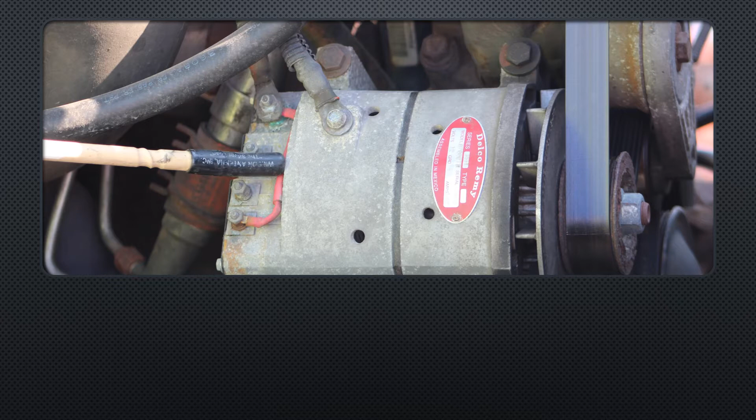Next, we'll move to the engine compartment. Checking alternator to ensure securely mounted and belt driven. Belt is in good condition and proper tension. Checking water pump, securely mounted, not leaking, gear driven. If you have a Mercedes or Cascadia motor, it will be belt driven.

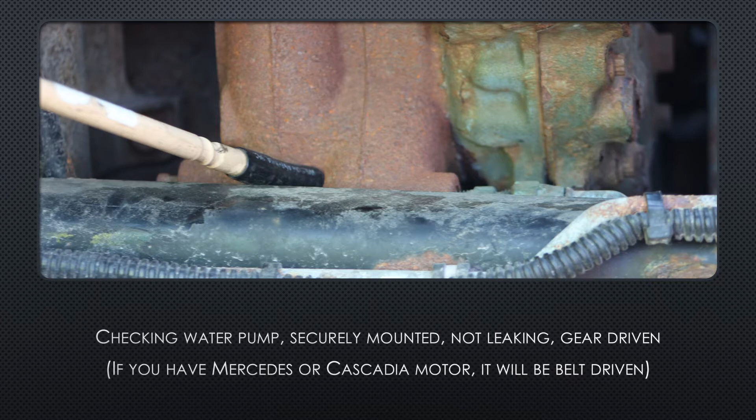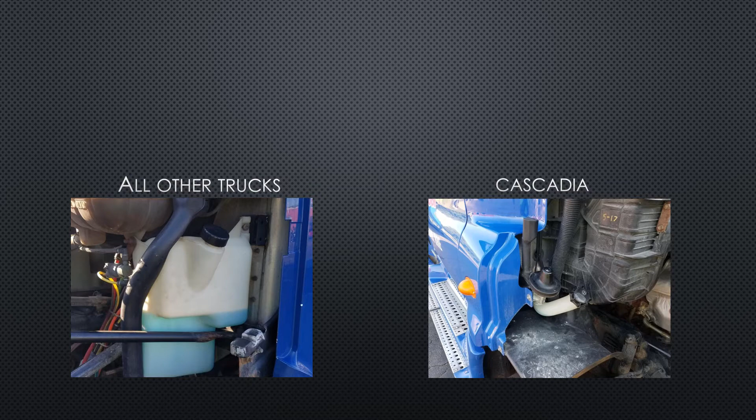Checking coolant reservoir, securely mounted, not leaking, proper level. Windshield washer fluid reservoir, securely mounted, not leaking, and full of fluid. Checking oil dipstick and oil fill cap, make sure you have oil at the proper level and cap is secure.

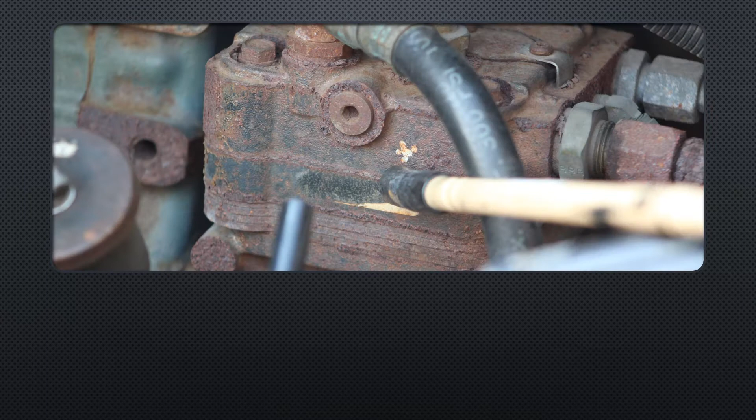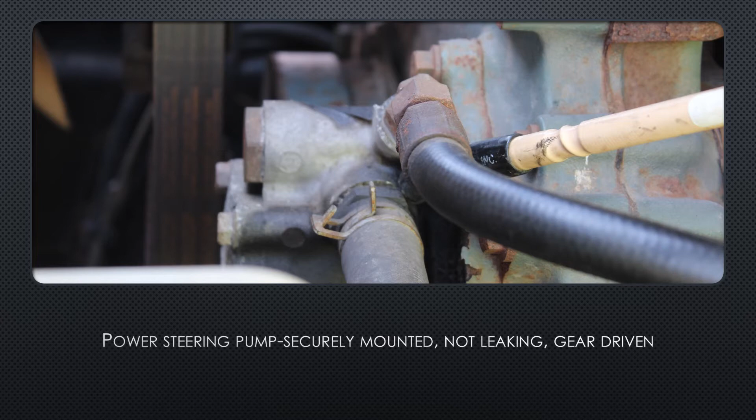Air compressor, securely mounted, not leaking, gear driven. Power steering reservoir, securely mounted, not leaking, at the proper level. Power steering pump, securely mounted, not leaking, gear driven.

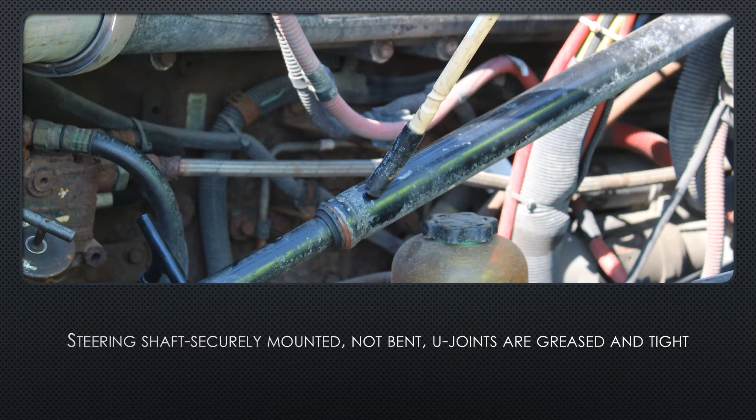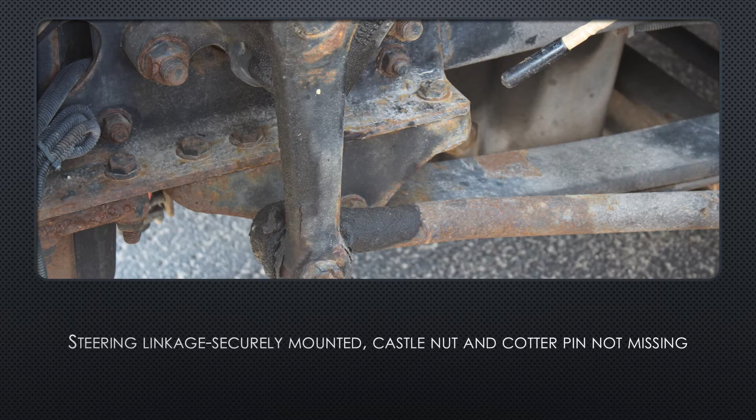Steering shaft, securely mounted, not bent, U-joints are greased and tight. Steering linkage, securely mounted, castle nut and cotter pin not missing. Steering gearbox, securely mounted, no missing bolts, not leaking.

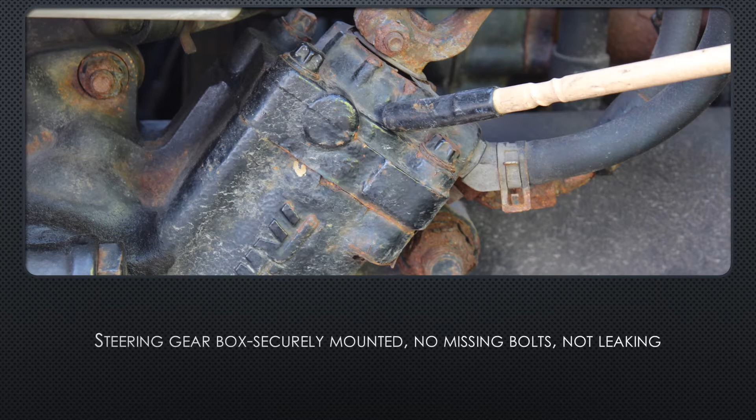General hoses and clamps are tight and not leaking. No leaks on the ground.

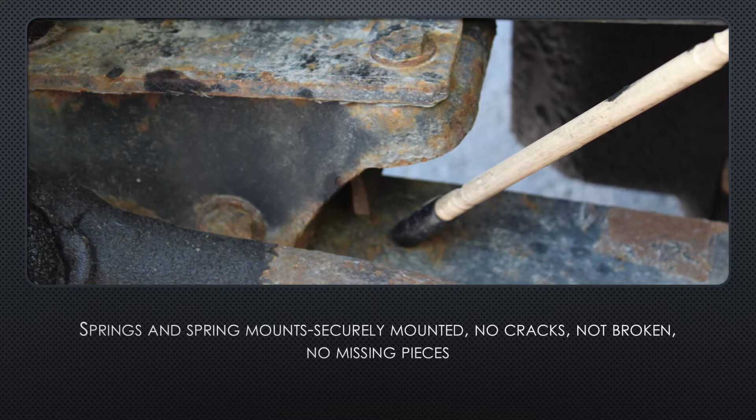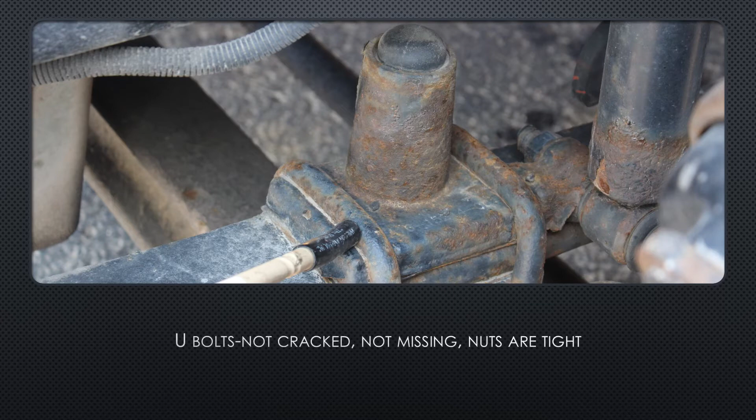Next, we'll move to steering axle, suspension, brakes, and tires. Springs and spring mounts, securely mounted, no cracks, not broken, no missing pieces. U-bolts, not cracked, not missing, nuts are tight.

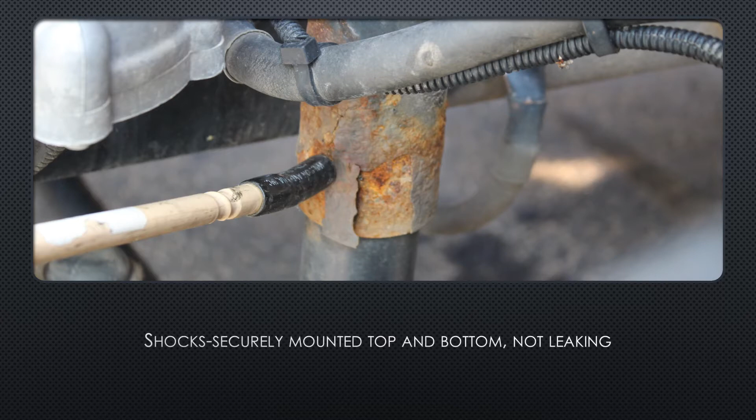Shocks, securely mounted, top and bottom, not leaking. Brake hoses, securely mounted, no cuts, not frayed, not leaking. Brake chamber, securely mounted, not damaged or leaking.

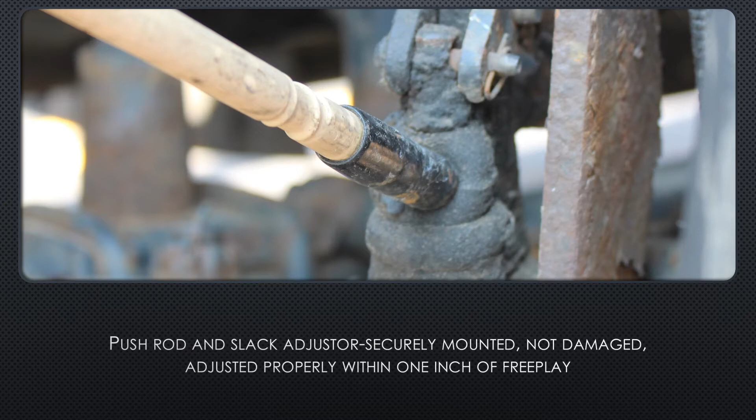Push rod and slack adjuster, securely mounted, not damaged, adjusted properly, within 1 inch of free play. Drums, pads, and liners, securely mounted, not damaged, broken, or missing, proper thickness, and no excessive grease.

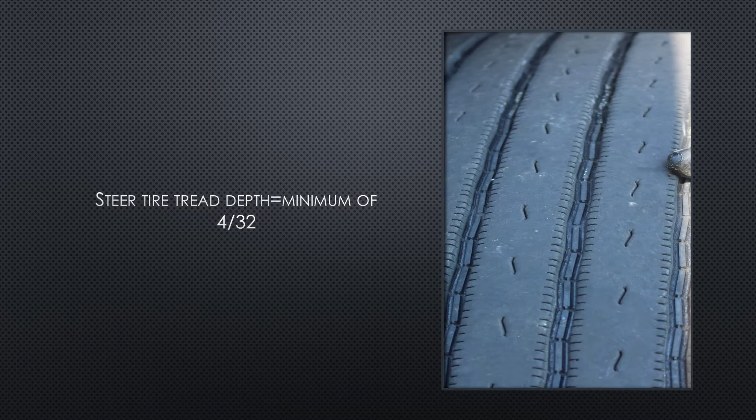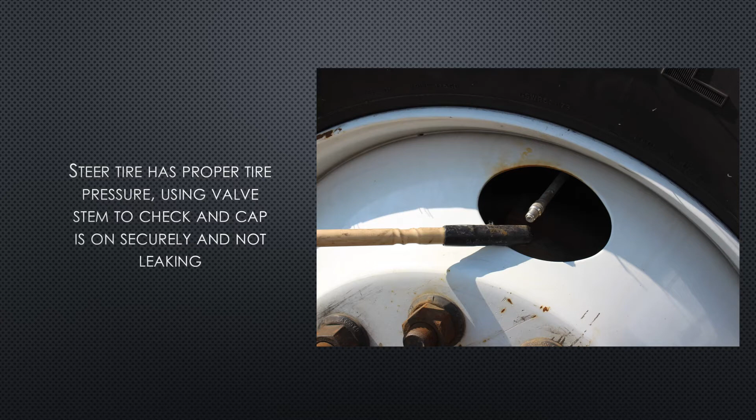Steer tire tread depth, minimum of 4/32. Steer tire sidewalls, no cuts or bruising. Steer tire has proper tire pressure, using valve stem to check and cap is on securely and not leaking. Steer tire rim, no cracks, no dents, no welds, securely mounted with lug nuts.

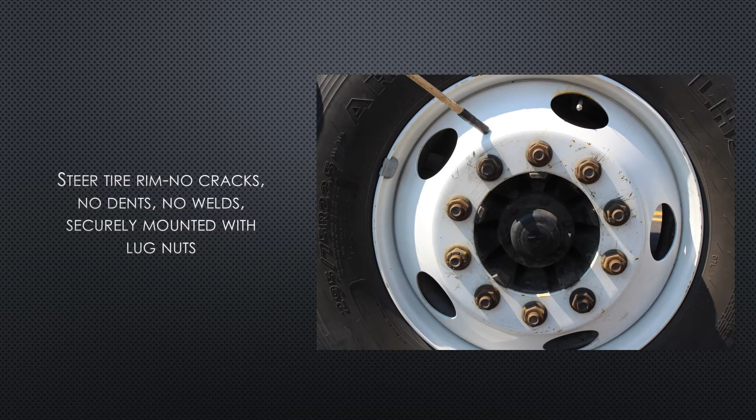Steer tire lug nuts, all there, all tight. No signs of looseness like rust spray or metal shavings. Steer tire hub oil seal, securely mounted, not leaking, oil at proper level.

Next, you will move to the vehicle side. Mirror, securely mounted, not damaged or missing. Door hinge, not rusted or broken. Door opens and closes properly.

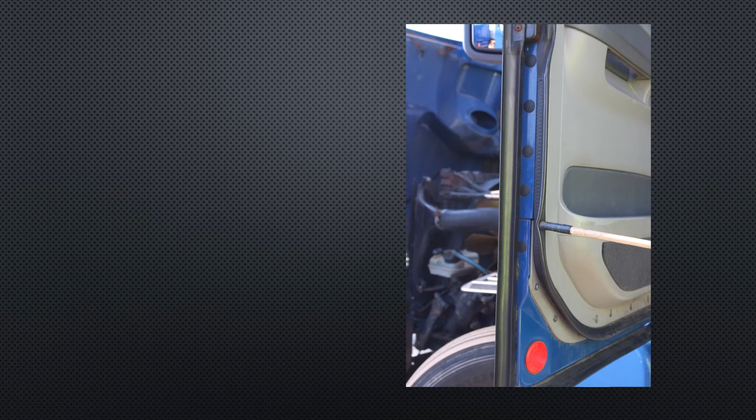Door latch, works properly, not damaged. Door seal, not damaged and in good condition.

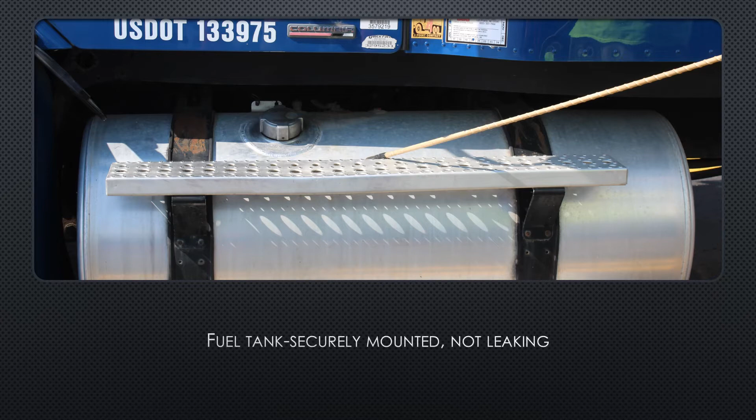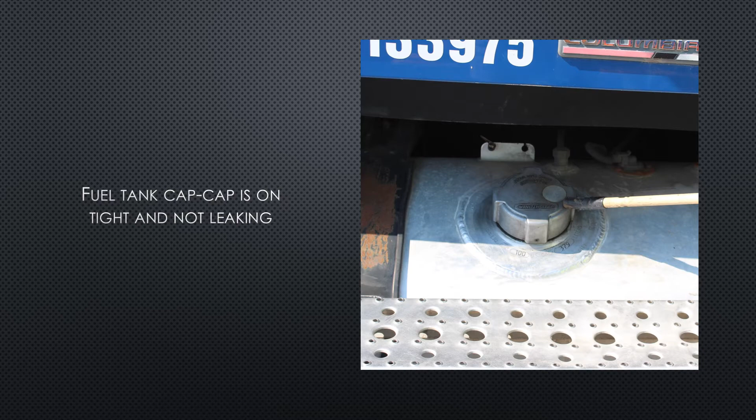Fuel tank, securely mounted, not leaking. Fuel tank cap, cap is on tight and not leaking. Fuel tank straps, securely mounted, not loose.

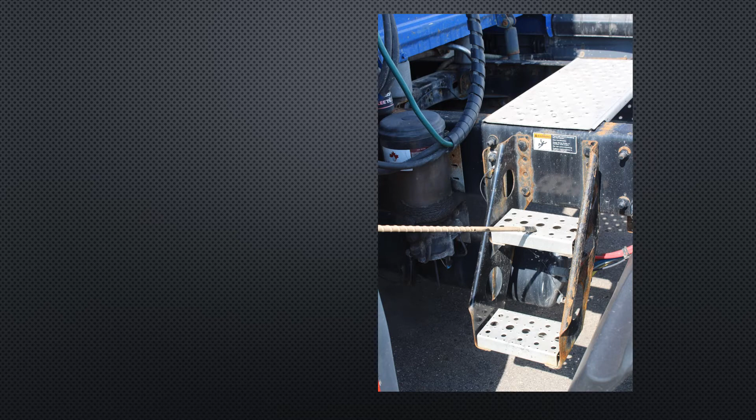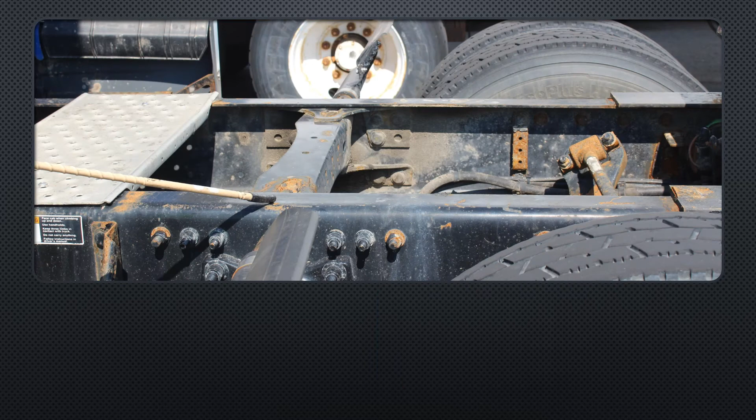Steps, securely mounted and free of debris. Catwalk and steps, securely mounted, not damaged, and free of debris. Frame, no cracks, no dents, no welds, none of the bolts are missing.

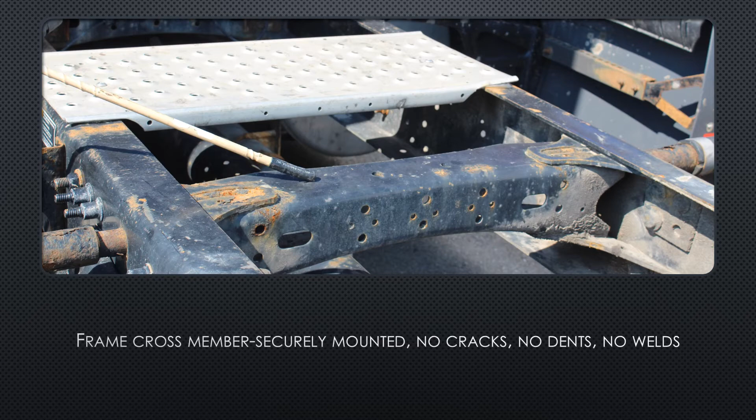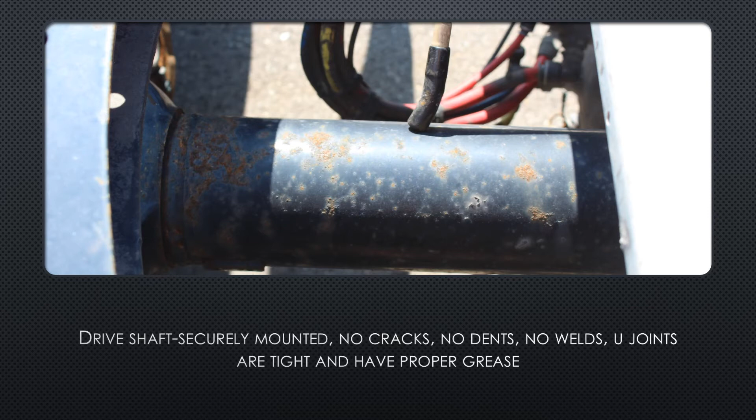Frame crossmember, securely mounted, no cracks, no dents, no welds. Drive shaft, securely mounted, no cracks, no dents, no welds. U-joints are tight and have proper grease.

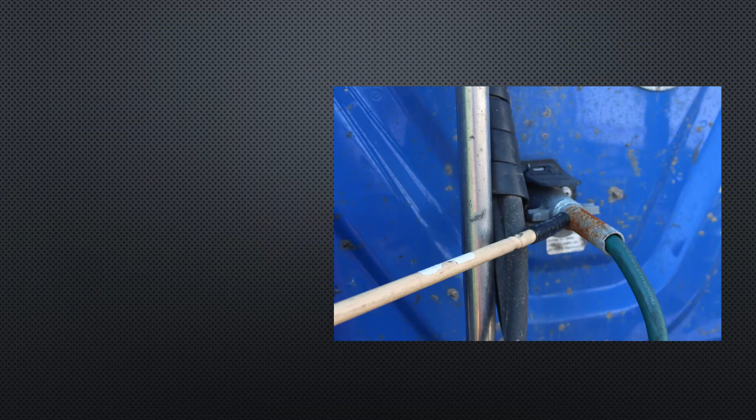Exhaust, securely mounted, not leaking. Airlines, securely mounted, not leaking, hoses are in good condition. Electrical, securely mounted, locked in with the safety latch, cable not damaged or frayed.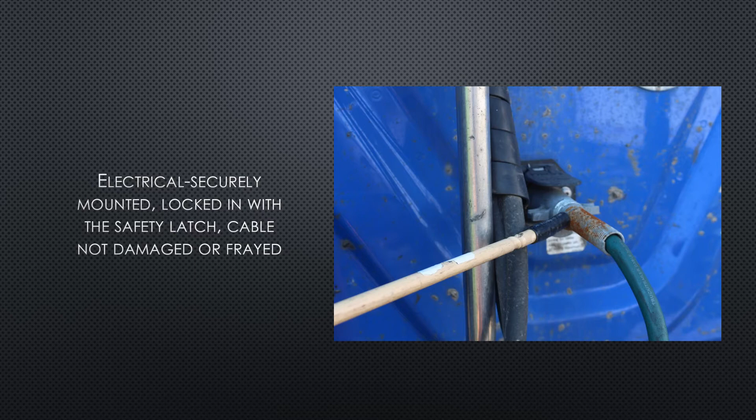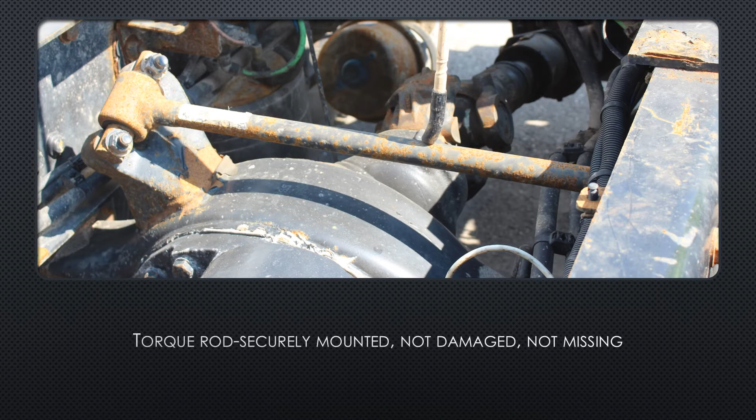Next we'll move to the tractor drive axle suspension, brakes, and tires. Torque rod, securely mounted, not damaged, not missing. Leaf spring and leaf spring mounts, securely mounted, not damaged, no cracks, nothing missing.

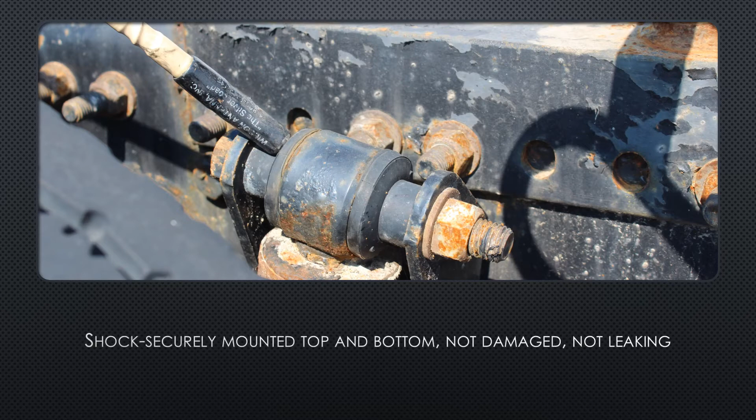U-bolts, not cracked, not damaged or missing, securely mounted, nuts are tight. Shock, securely mounted, top and bottom, not damaged, not leaking. Airbag, securely mounted on top and bottom, not damaged, not leaking.

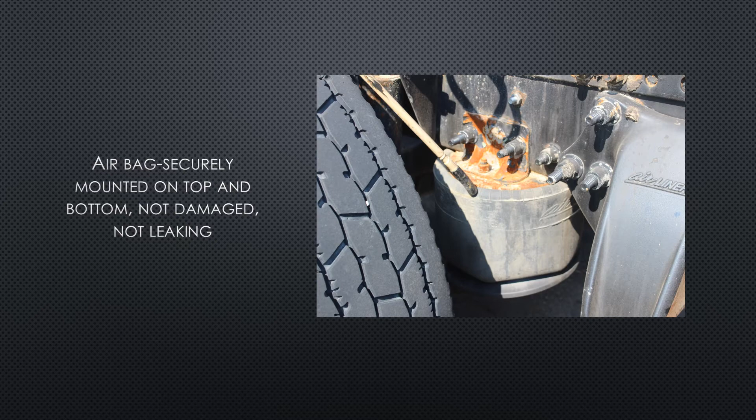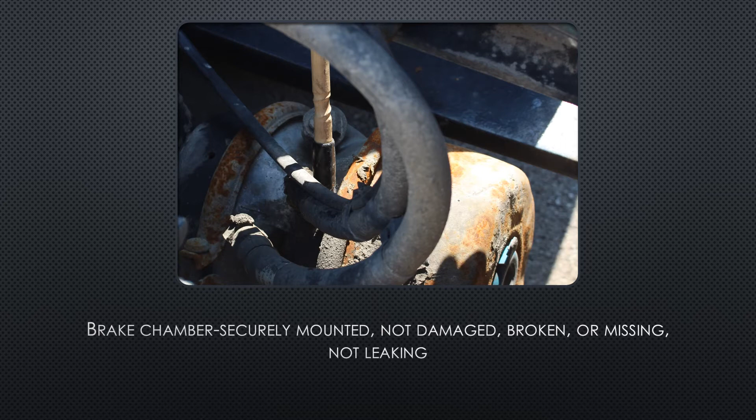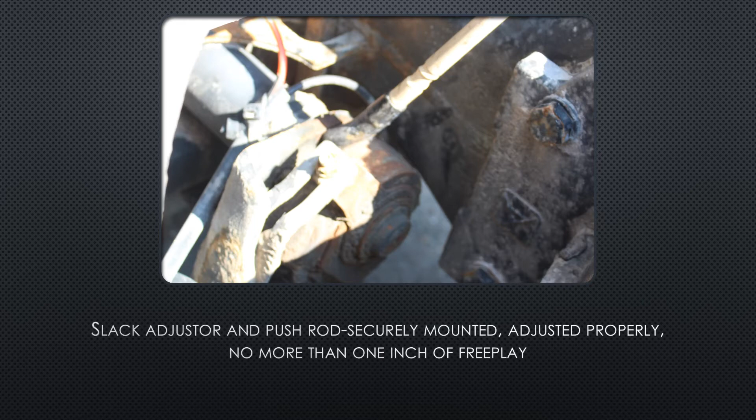Airline, securely mounted, not damaged, not leaking. Brake chamber, securely mounted, not damaged, broken, or missing, not leaking. Slack adjuster and push rod, securely mounted, adjusted properly, no more than 1 inch of free play.

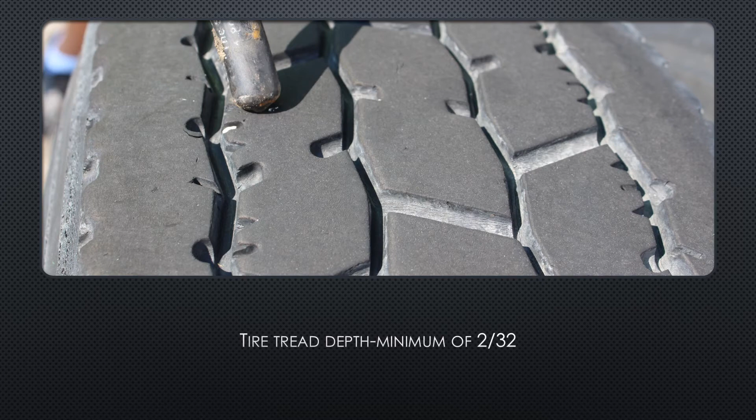Drums, pads, liners, securely mounted, nothing damaged, broken, or missing, proper thickness, no excessive grease. Tire tread depth, minimum of 2/32. Tire sidewalls, no cuts, no bruising.

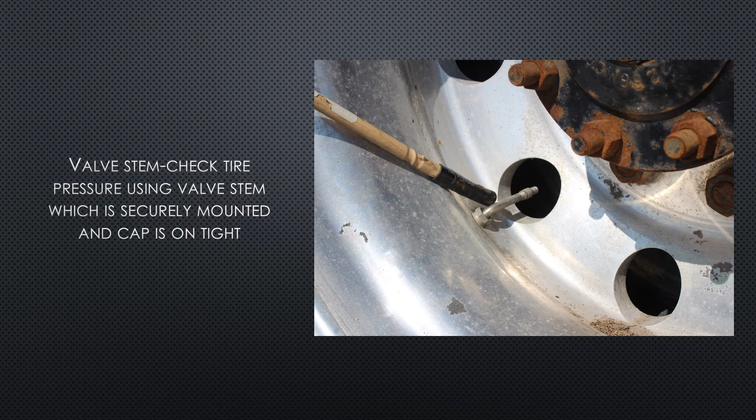Valve stem: check tire pressure using the valve stem, which is securely mounted and the cap is on tight. Bud spacing: I have bud rims, so I have proper spacing. Rims: bud rims are securely mounted with the lug nuts, no cracks, no dents, no welds.

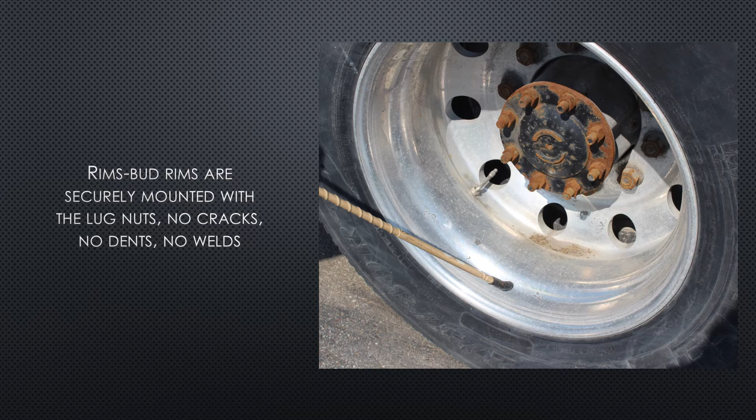Lug nuts: all tight, all there, no flaking or rusting or other signs of looseness. Hub oil axle seal: securely mounted, not leaking.

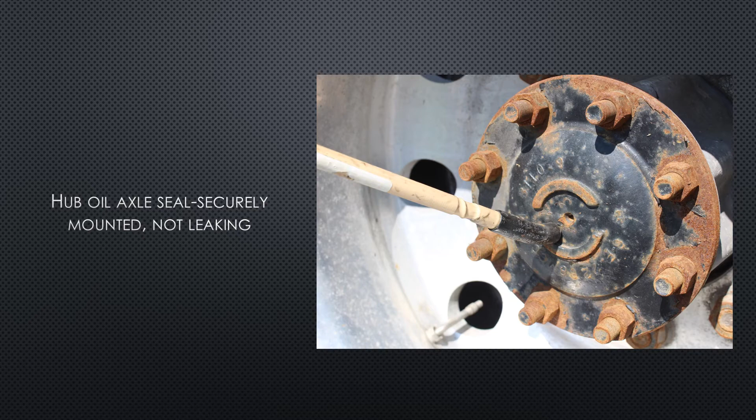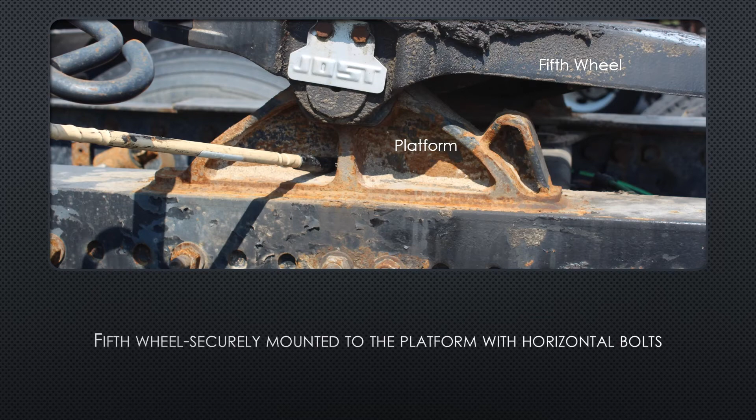Coupling devices, truck and tractor. Fifth wheel: securely mounted to the platform with horizontal bolts. Platform is securely mounted to the frame with bolts on top and bottom, stationary so there are no locking pins. If there are locking pins, the platform is securely mounted to the slide rail, which is securely mounted to the frame. Locking pins are locked into transit position.

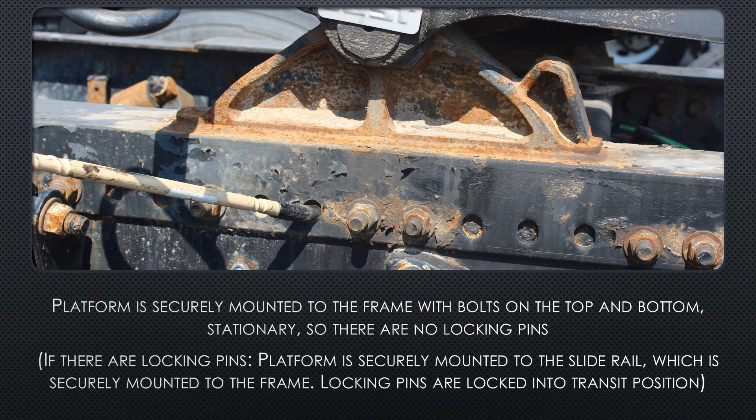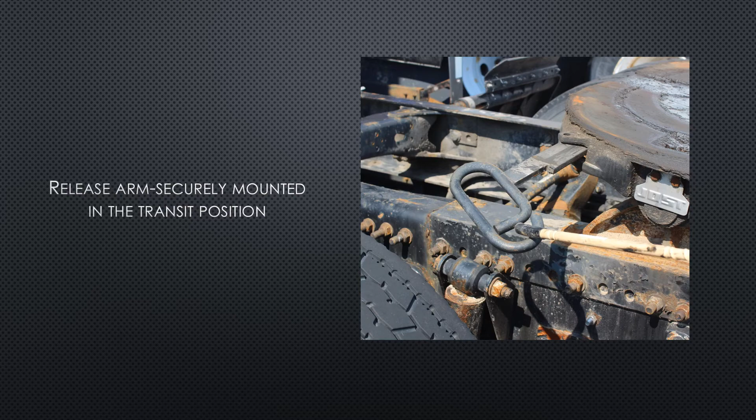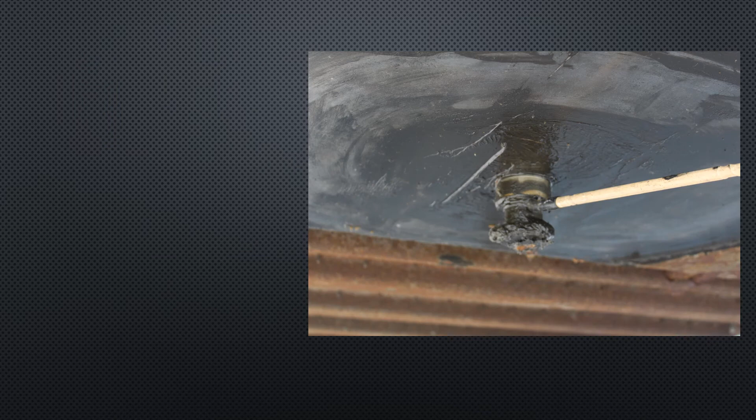Release arm: securely mounted and in the transit position. I checked my safety latch to make sure it's working properly. Locking jaws: securely mounted and greased properly. Kingpin: securely mounted, not cracked or bent.

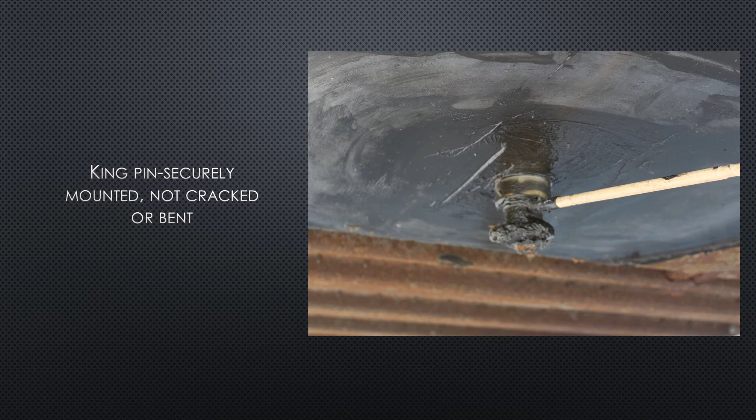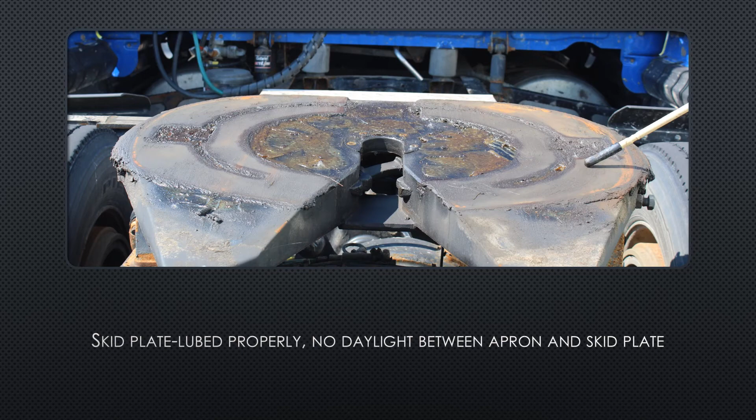Apron: securely mounted, no cracks, no dents, no welds. Skid plate: lubed properly, no daylight between apron and skid plate. Proper clearance between fifth wheel and landing gear for turning.

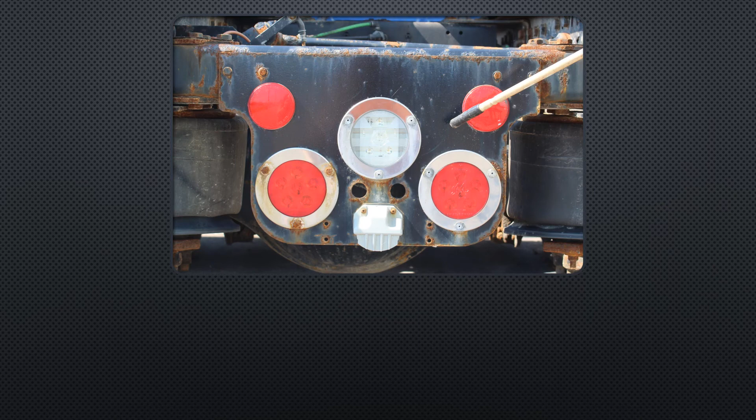Next, we will move to the rear of the truck. Splash guards and reflectors: securely mounted, nothing damaged, broken, or missing, proper length. Lights and reflectors: securely mounted, nothing is cracked or missing.

Next, we'll move to the front of the trailer. Clearance and marker lights: securely mounted, not missing. Header board: not damaged or cracked.

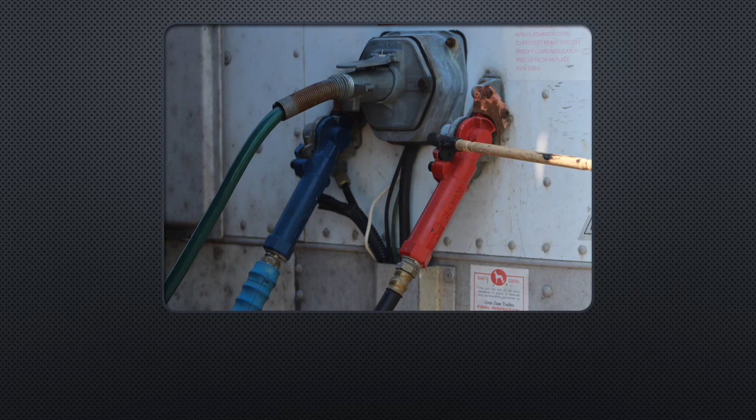Glad hands: securely mounted, hoses not damaged or leaking, seals are in good condition. Electrical: securely mounted, locked in with safety latch and cord is in good condition.

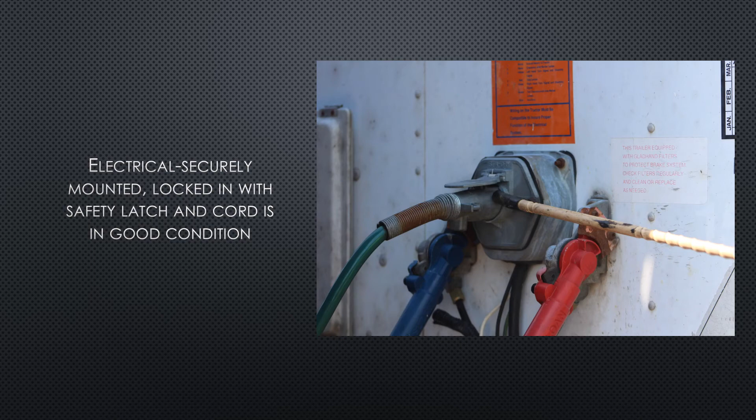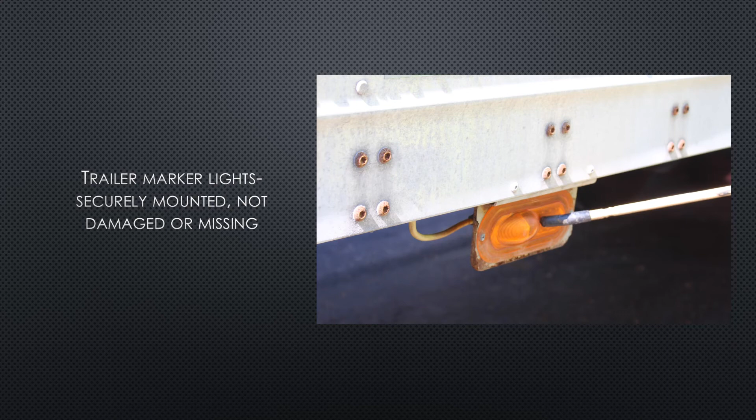Now we'll move to the trailer side. Clearance and marker lights: securely mounted, nothing is cracked or missing. Trailer marker lights: securely mounted, not damaged or missing.

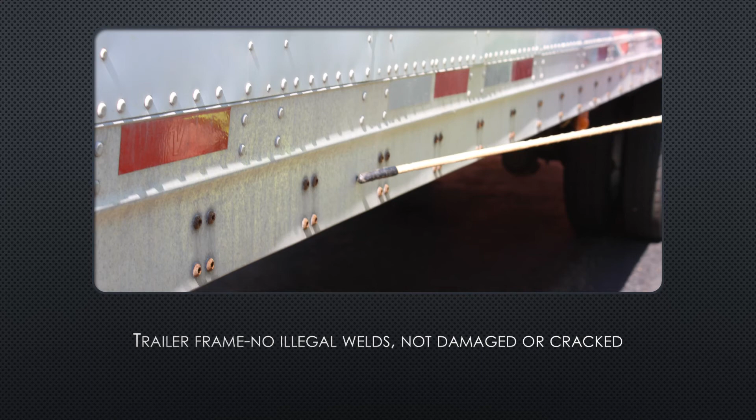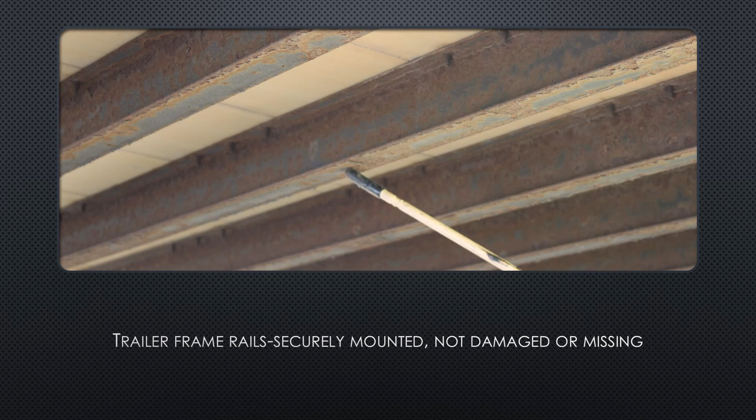Landing gear: securely mounted, nothing is cracked, broken, or missing. Trailer frame: no illegal welds, not damaged or cracked. Trailer frame rails: securely mounted, not damaged or missing. Trailer deck: no holes in the deck.

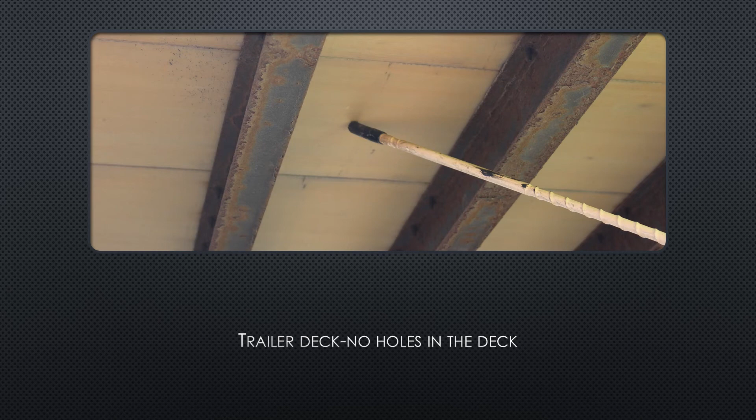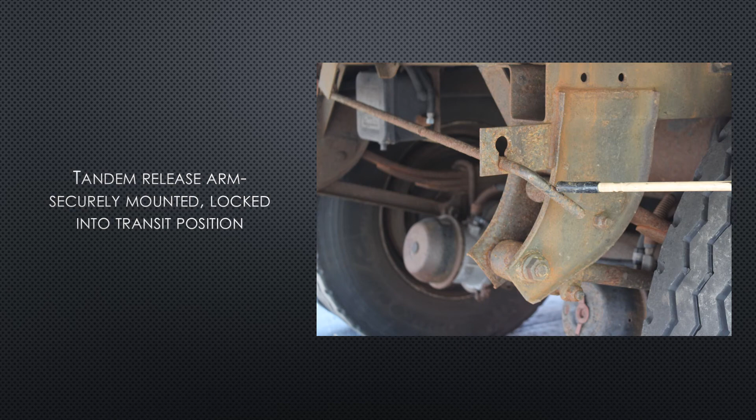ABS light: securely mounted, not damaged or missing. Tandem release arm: securely mounted, locked into transit position. Tandem release arm locking pins are locked into transit position.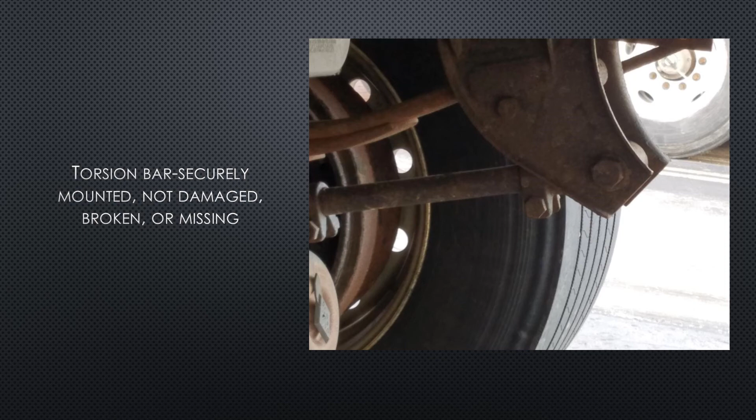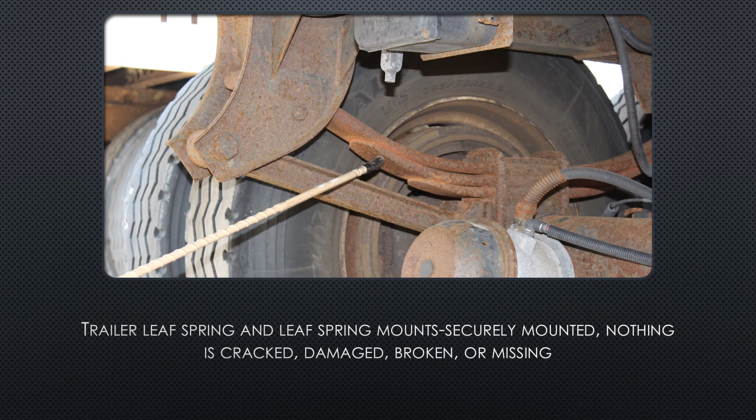Next, we'll move to the trailer axles. Torsion bar: securely mounted, not damaged, broken, or missing. Trailer leaf spring and leaf spring mounts: securely mounted, nothing is cracked, damaged, broken, or missing. Trailer U-bolts: securely mounted, not cracked, damaged, broken, or missing, and no bolts are missing.

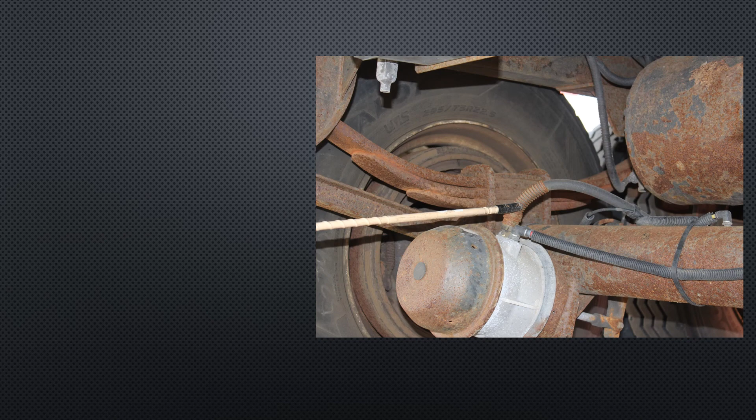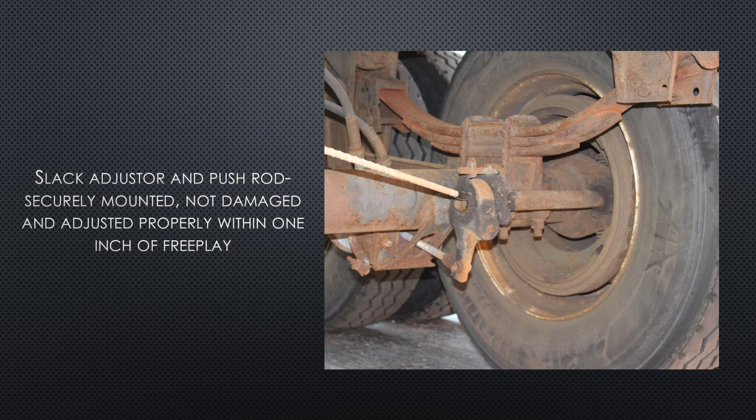Airline: securely mounted, not leaking, not damaged or frayed. Brake chamber: securely mounted, not damaged, not leaking. Slack adjuster and push rod: securely mounted, not damaged, and adjusted properly within one inch of free play.

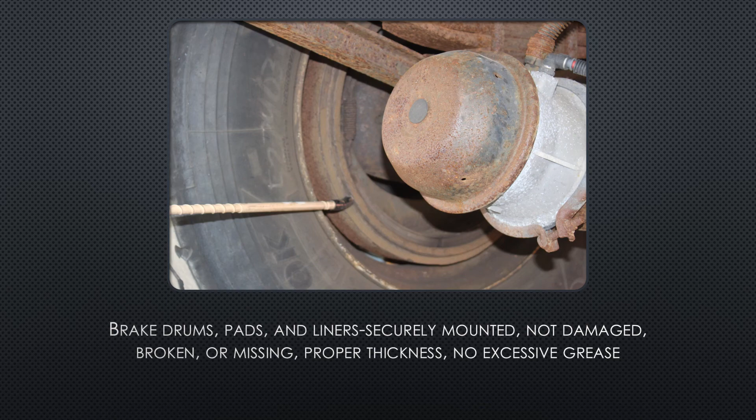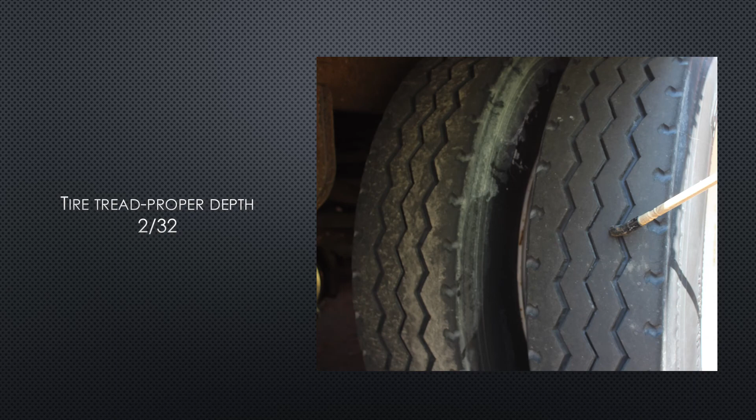Brake drums, pads, and liners: securely mounted, not damaged, broken, or missing, proper thickness, no excessive grease. Tire tread: proper depth, two thirty-seconds. Tire walls: not cracked or bruised.

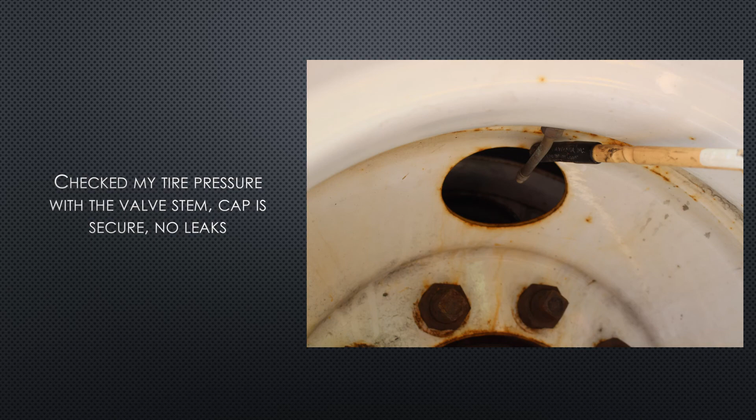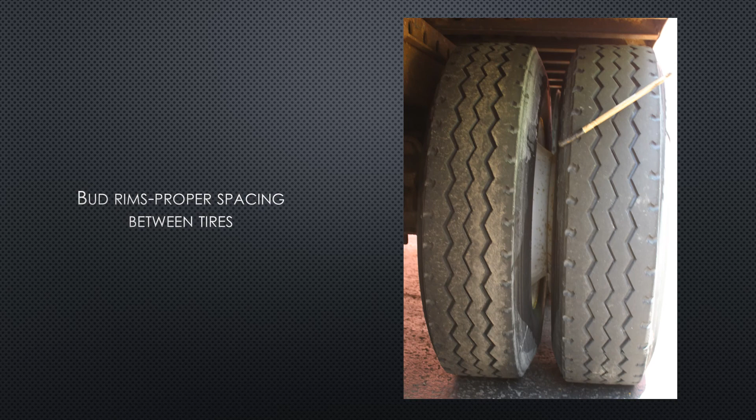Checked my tire pressure with the valve stem, cap is secure, no leaks. Bud rims: proper spacing between tires. Bud rims are securely mounted with lug nuts, no cracks, dents, or welds.

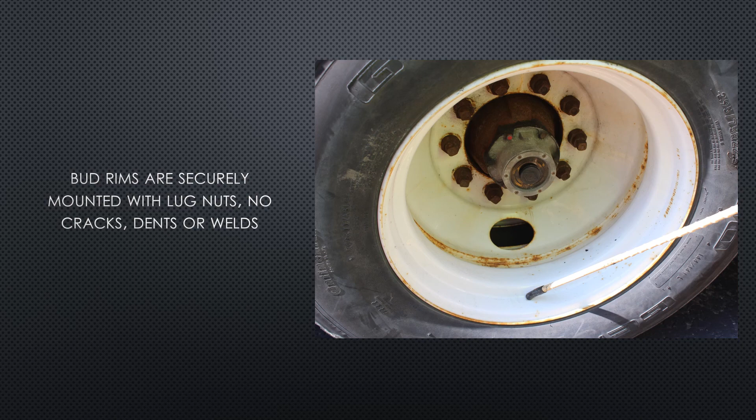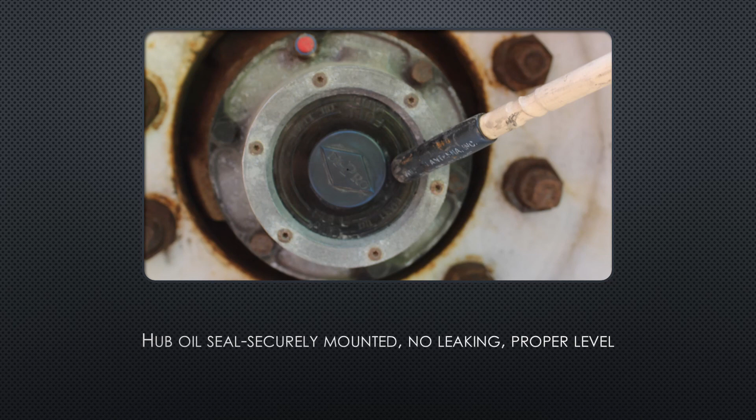Lug nuts: all tight, all there, no rust or flaking or other signs of looseness. Hub oil seal: securely mounted, no leaking, proper level. Now we'll move to the rear of the trailer.

Splash guard: securely mounted, not cracked, proper length. Trailer latches: securely mounted and locked in the transit position. Trailer hinges: securely mounted, nothing is damaged or missing. Tail running lights: securely mounted, nothing cracked or missing.

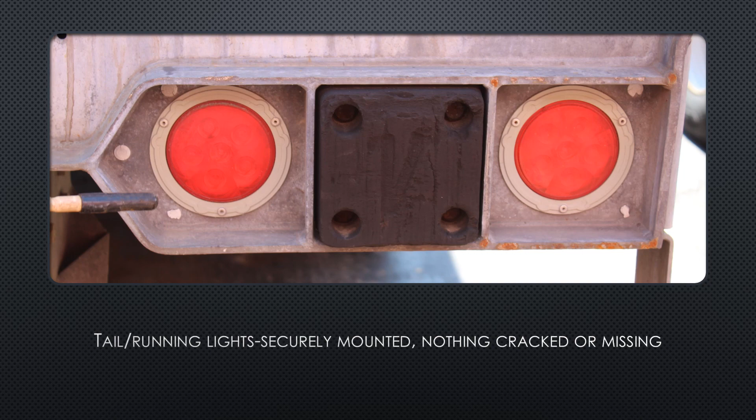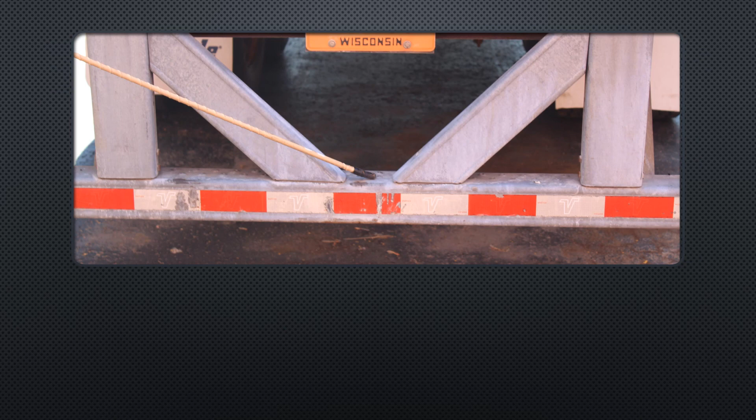Trailer clearance and marker lights or ID lights: securely mounted, not damaged or missing. DOT bumper: securely mounted, not damaged or missing. At this point, ask the examiner to help you with the light check.